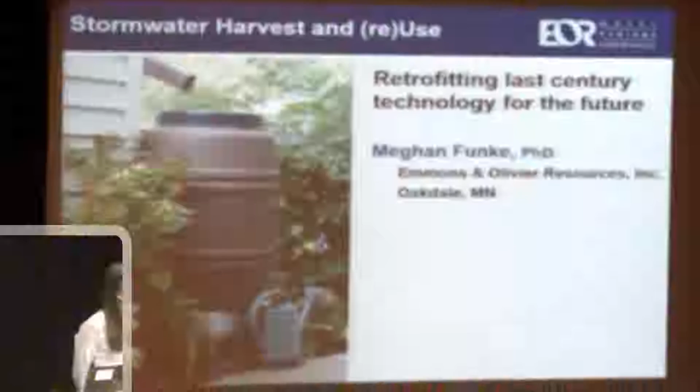So this is going to be a talk kind of expanding on Brett Emmons' talk earlier this morning, focusing in on stormwater harvest and use as a low-impact development practice. So we're just going to talk specifically about that. Titled it Retrofitting Last Century Technology for the Future.

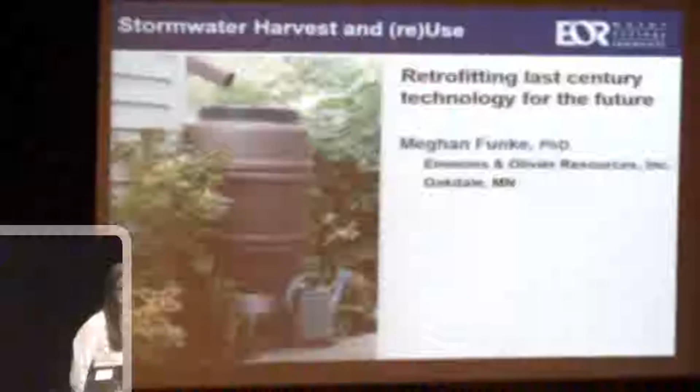The reason we say that is harvesting water and using it is a common practice globally. We've forgotten about it a little in the U.S., where potable water is available everywhere and convenient. We like having very high quality water for all of our needs, even though it's not always necessary.

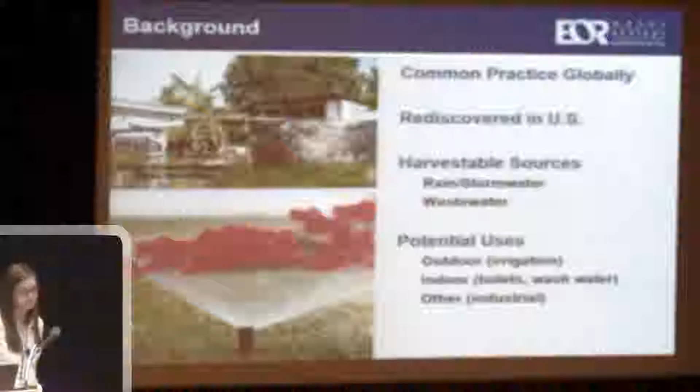But in other parts of the world, especially when there are arid climates or water resources are limited, or in poor regions of the world where extracting groundwater is too expensive, this is a really common practice. So we're rediscovering it in the U.S., and I just wanted to define what we mean by stormwater harvest and use. So mainly when we talk about harvesting water, it's anything from rainwater, stormwater across the landscape, even wastewater.

We started a little early, so I apologize for just coming in.

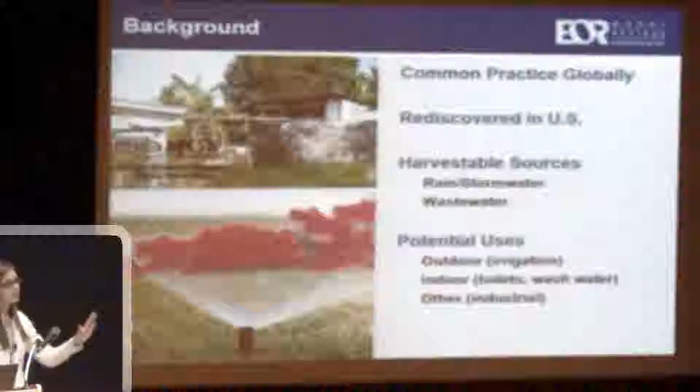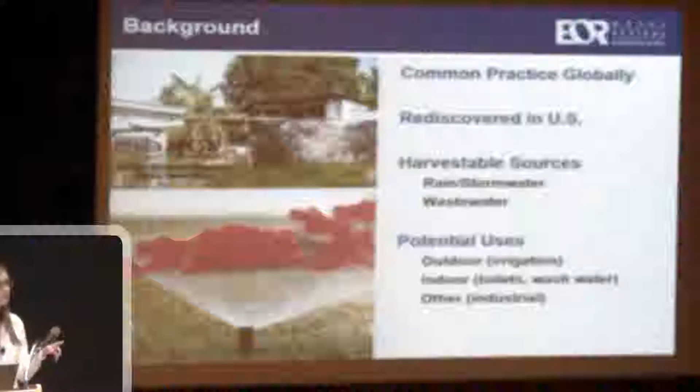So definition of harvest and use, right? So we're harvesting rainwater and stormwater, and then we're using it for all of our needs. So irrigation, toilet flushing, wash water, industrial water. So it's kind of the big universe that we're talking about. But specifically in this talk, it's mainly focused on stormwater harvesting and then using for irrigation.

So this practice is becoming more prevalent primarily due to three driving factors. One, there are new stormwater rules. This is similar to what Brett was talking about in terms of achieving a zero discharge community. So there's a need, instead of just having rate control, to actually reduce runoff volume. So infiltration doesn't always get you there, so you need an alternative practice.

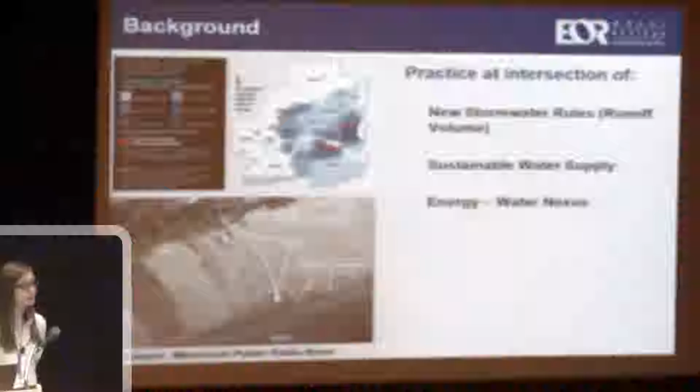And then there's also some growing concerns with having sustainable water supplies. So our increased growth, population growth, and water demands have depleted our aquifers. This isn't really obvious. It's a hidden issue because we don't see our aquifers, but at least in the Southwest, the reservoir levels are at record lows.

And even in Minnesota, in the Minneapolis-St. Paul region, the suburban cities primarily draw their potable water from the Prairie du Chien aquifer. And it's been in the news a lot lately. We're seeing some low levels in that aquifer that's connected to some larger deep lakes that have shown at the surface what these losses are. The bottom image on the left is just showing large lake level declines in White Bear Lake.

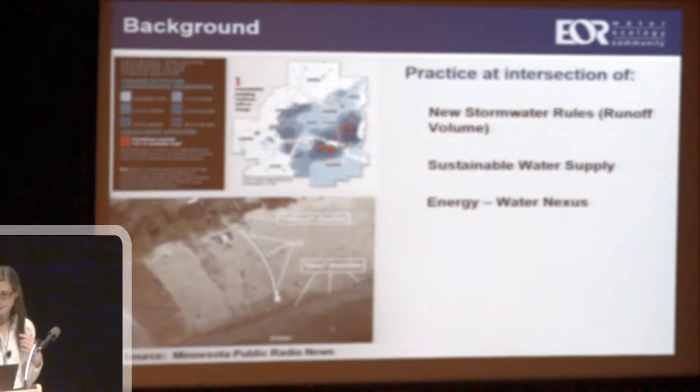And then the third factor is just this, what I would term this energy-water nexus. So what we mean by that is our current system of potable water management, stormwater management, wastewater. It's all very compartmentalized. It's all very linear. So in terms of stormwater management, we have all these costs to handle, collect, treat, and discharge stormwater downstream. So we're trying to get rid of that as quickly as possible.

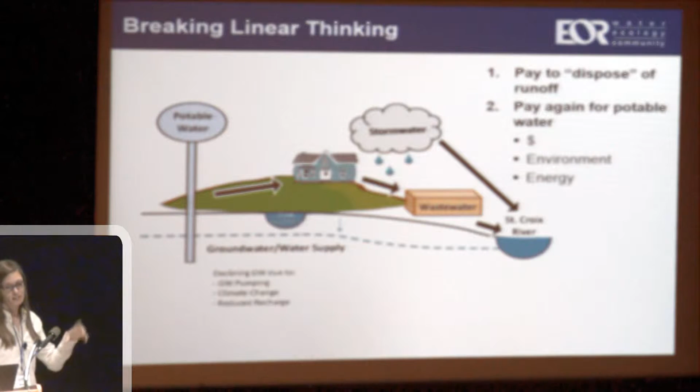But then on the same hand, after paying for all those stormwater management costs, then we go back and we're extracting groundwater, we're pumping it to a centralized location, we're treating it, and then we distribute it to all our homes. So what if we try to break that linear way of thinking and start to close the loop where we utilize some of that wastewater, stormwater for some of our water demands and save a lot of money in terms of cash, but also environmental costs and energy costs.

So as cities and watersheds are trying to meet these new volume control standards, a lot of the cities were coming up with wanting to use stormwater harvest and use for low impact development when they're in these problem sites. So infiltration isn't feasible. They have tight soils, it's close to the groundwater level, there might be some contamination. And so at least we're finding in Minnesota and nationally that this practice is becoming more common.

But as people are trying to use this practice to achieve these volume reduction goals, we had a lot of people coming to us asking, well, how much volume runoff does it remove? How much credit can I get for this practice? So we realized there's a need for a tool to help account for this. It's a much more variable system than some of the other practices.

So we worked with the Minnehaha Creek Watershed District and Mississippi River Watershed Management Organization to develop a calculator tool to help designers model their stormwater harvest and use systems, optimize storage, irrigation potential, and to really get a sense of what is the percent of volume reduction from their site, what's the fraction of pollutants they can reduce. So the goal was to have a relatively simple tool.

There are existing tools out there if you're familiar with some rainwater harvesting calculators, but they were primarily developed for arid regions where the goal is really to conserve water. They want to hoard it to save it for potable water uses. In the Midwest, where water is more plentiful and we have excess stormwater, our goal is really how can we consume as much stormwater as possible. We want to collect as much stormwater and apply it for irrigation or other indoor demands to get rid of that stormwater.

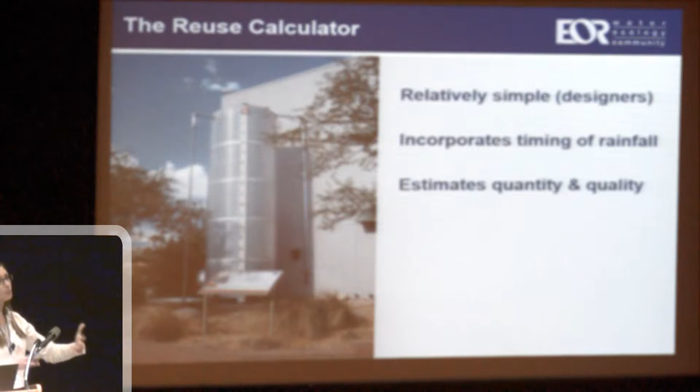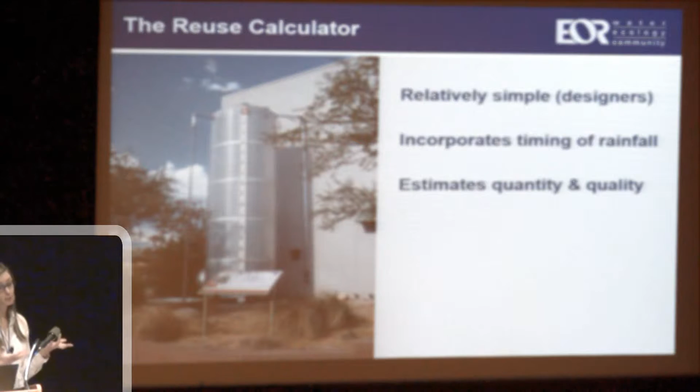So some of the key elements of this tool that we developed is it's on a daily basis, which most of these models are, because timing of rainfall is really important. So if you get a bunch of back-to-back rainfall events and you have a pond or a cistern collecting your stormwater, how often you get a rainfall event is just as important as how big your rainfall events are. And then also we wanted to look at not only volume in that system, but also pollutants. What sort of phosphorus reductions and especially dissolved phosphorus can we remove as part of the system?

So the skeleton and the basis of the model is just a water and a phosphorus mass balance. So there's a watershed runoff generator component, so you wouldn't have to figure out what your watershed volumes and phosphorus flows are. Just use the curve number, percent impervious area to estimate from your site what that watershed runoff volume and load is of phosphorus. And this is particularly related to phosphorus, but in the future could be applied to nitrogen when that's more of a concern.

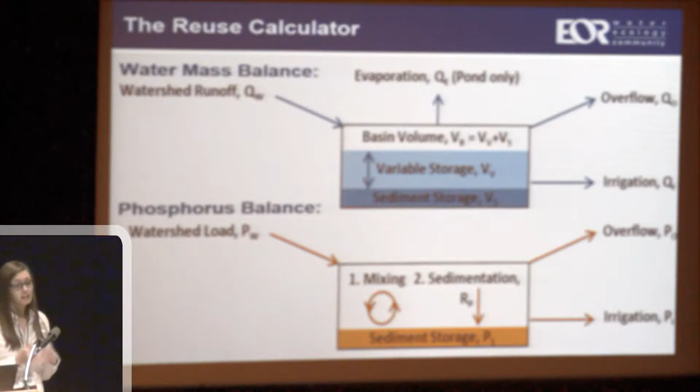And then within the actual storage itself, this is showing an example of, it could be either a stormwater pond or a cistern. Then it looks at your dead pool storage, your variable storage, the total size of the basin, keeps track of all of those components of the flow, in addition to evaporation, maybe from the surface of a stormwater pond, the volume going to irrigation, and to overflow. On the phosphorus side, we wanted to keep track of the mixing and sedimentation processes. Stormwater ponds are built to retain some particulate phosphorus, but then also we really wanted to keep track of that dissolved phosphorus pool as it's going out in overflow and then also to irrigation.

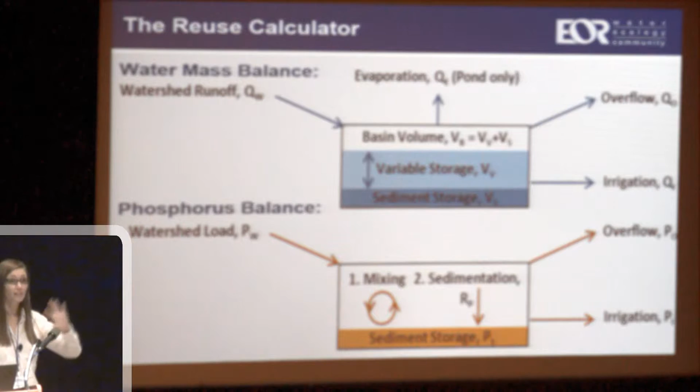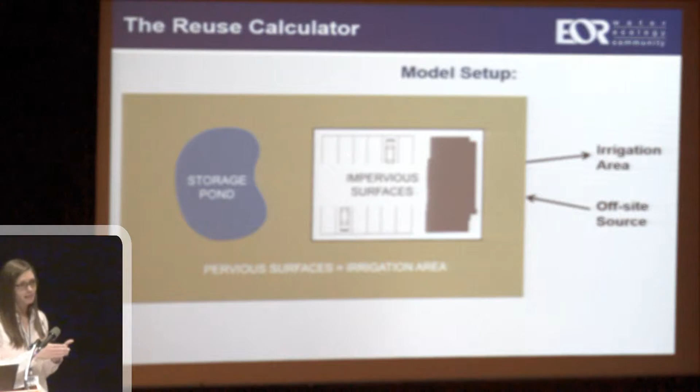So in terms of the model setup, it's simplified. It assumes it's one site. There's one storage area. There's your percent impervious area. You have your pervious area, which is assumed to be what you irrigate. But we've been finding you can use this tool to simulate maybe you're collecting your stormwater from a highly urban site, but you're going to irrigate somewhere else. So you just put all those numbers into the model. So I'm just going to run through an example to show you what the tool looks like and how it can be used to evaluate the benefits of stormwater harvesting use.

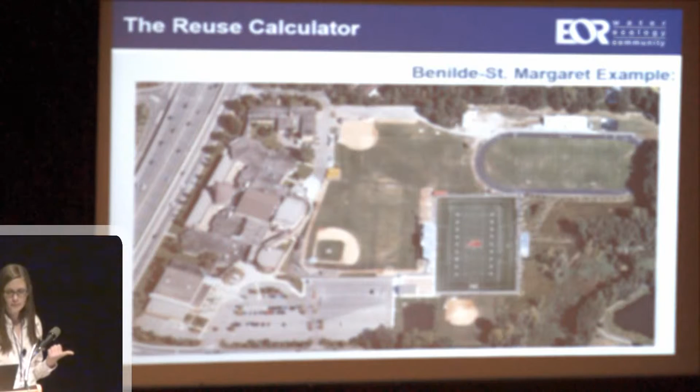So Benilde-St. Margaret's is a private high school in Minnesota. Series of buildings, there's some ball fields, and this comes up better than I thought. So there's black and pink hashing, that's all the impervious area on the site. So the impervious area is 31 acres. And then the ball fields are in the center. There's 2 ball fields and then a track and field. And that's about 8 acres of pervious area that we wanted to irrigate.

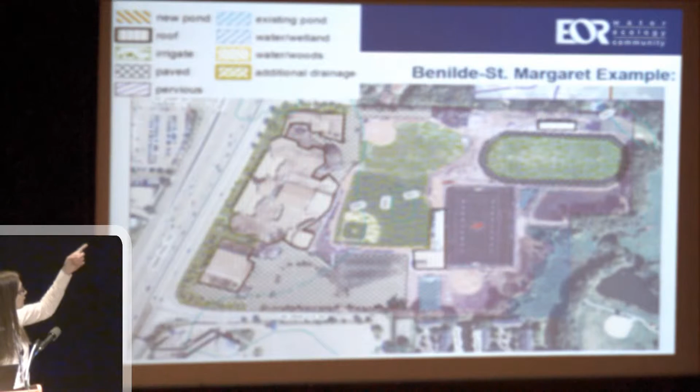So the system is modeling collecting the watershed runoff generated from the 31 acres. There's 2 ponds, one below the track and field in blue hatching and one below kind of a darker field near the bottom. Those are our storage ponds, and it's used to apply irrigation water on those 3 fields. I think it's 30% or 38% impervious area.

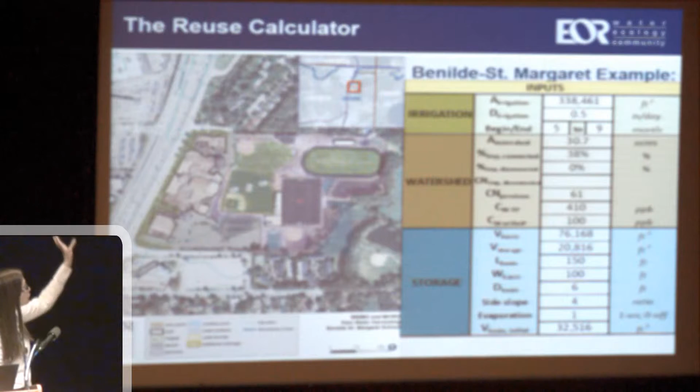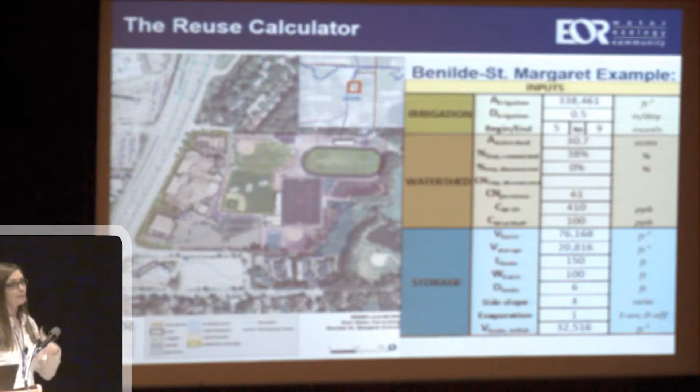So the tool is trying to be graphical and as simple as we could in terms of input so that water resource managers can use it, but it can still be used for designing these systems. So it just goes through, you have your irrigation, you can set how much you want to irrigate, especially in harvest and use when the goal is to consume as much water as possible. You might want to increase that irrigation amount as much as possible. How much can the grass and soil really take up? We're not trying to irrigate as little as possible to keep our grass growing. It's kind of the opposite of our typical lawn management: let's dump as much as we can on to reduce our water.

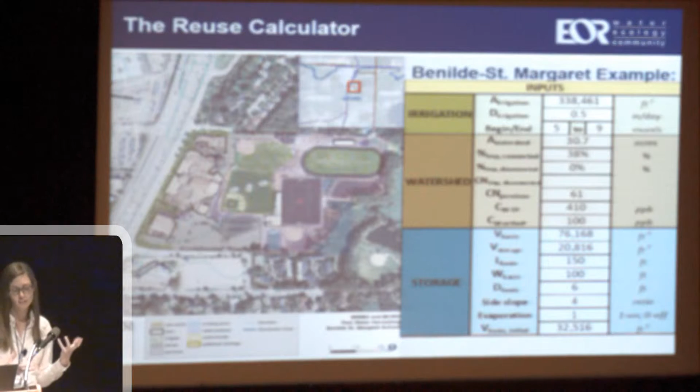In terms of the watershed, that's where you put in your total watershed area, the percent impervious, some curve number estimates to get your watershed runoff volumes and loads. And then there's all the storage components of your pond or your cistern. What's the volume? What's your dead storage? It gets that evaporation from the pond, which will be variable with depth, since that lower volume is a much smaller surface area. So it accounts for all of those variable factors to really help calculate where that volume is going and what benefit is from that irrigation component.

So then kind of the guts of the calculator is there's a graphical output of the results. What I just want to show you, this is 1 year. On the x-axis is just January to December. On the left axis is just the volume in your basin. And so you can see there's a dashed line, gray dashed line on the bottom. That's essentially your dead storage. So we won't ever draw our basin below that amount.

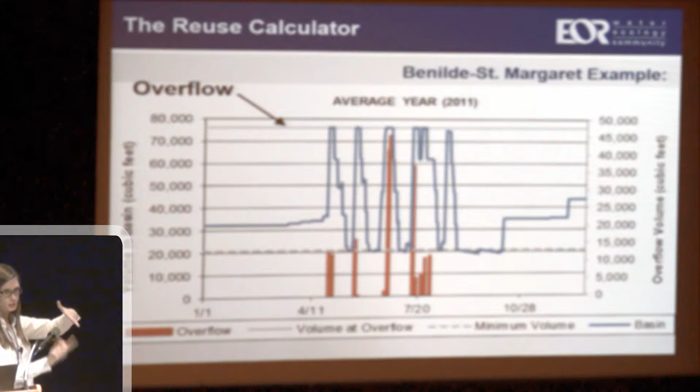We need some volume in the pond or the cistern to allow for phosphorus sedimentation. We don't want to disrupt all the particles as we're pumping out for irrigation. The top line is then our overflow volume, so it would never exceed that amount in volume. And then the blue line is just showing, based on a simulated year with actual rainfall events, what the volume in that basin is. So you can see it starts out about half full, it fills up with a rainfall event, there's some irrigation demand, you see the volume drops, and continues on.

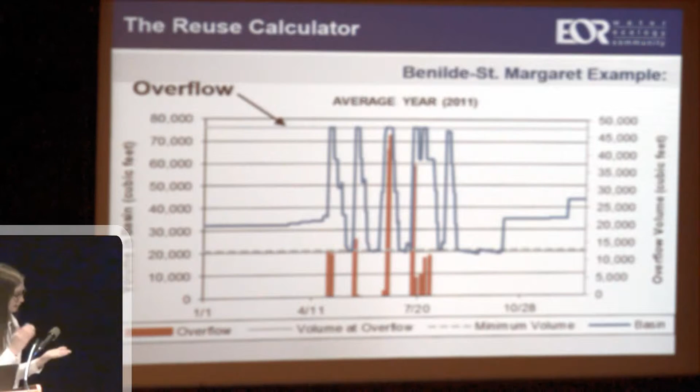So this is useful for designers when you might have existing stormwater ponds, or it might be in a residential area, and it's an aesthetic feature. So there's other things to consider. Maybe you don't want your pond empty all the time because people want to see it as a pond. So you can make sure that it's not always at the dead pool level.

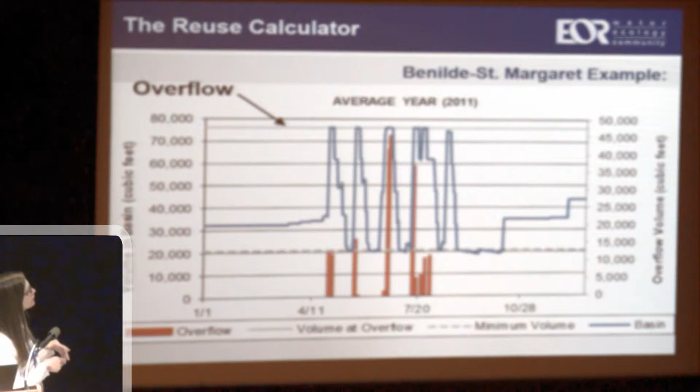And then another thing in terms of sizing is you want to make sure you're kind of optimizing how much overflow you have. So the red bars on the bottom are showing when we have overflow. So we've got a rain event that collected more water than our basin can handle. And you can see how often that happens and how much. So if you want to try to minimize the amount of overflow, maybe you make your storage size larger.

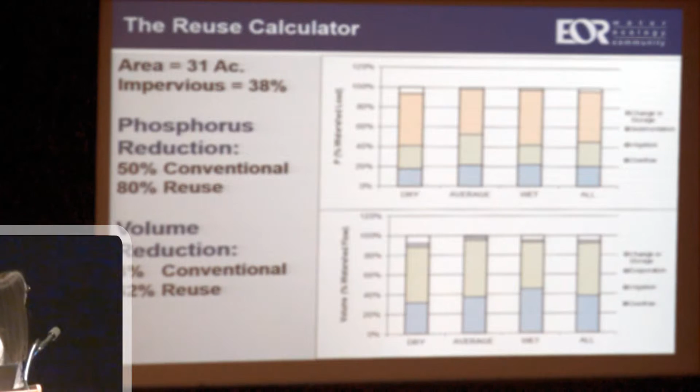And then just overall, calculate on an annual basis. So from this example site, 31 acres, 38% impervious, it also partitions where that phosphorus and the volume is going. So the phosphorus is in the top bar graph, the volume is in the bottom bar graph. And blue is overflow, green is irrigation, and then the orange, especially for phosphorus only, is that sedimentation within essentially your stormwater pond. So it kind of gets at the compartmentalizing. The tool goes through a dry, average, wet year, and then just looks at all 3 years together.

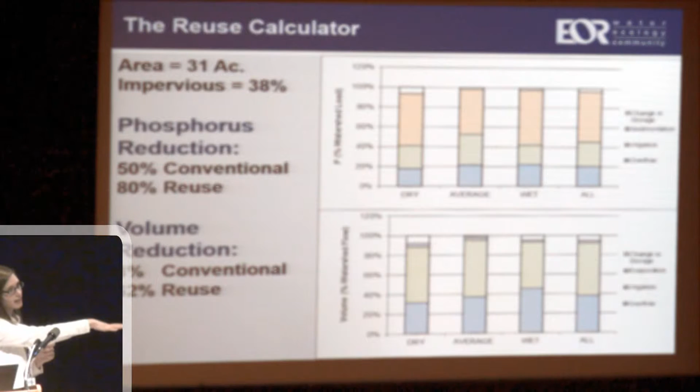But overall, for this site, you can see that if it was just a conventional stormwater pond, we get 50% reduction of phosphorus, mainly just the sedimentation of that particulate fraction. With reuse, we can increase that to 80% because we're getting at that dissolved phosphorus fraction that's going through irrigation and being applied on that lawn instead of being discharged downstream.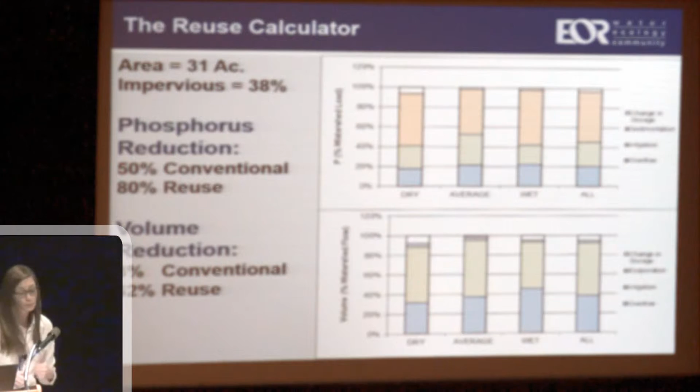In terms of volume reduction, maybe 3% with a conventional system where it's just focusing on rate control. We get up to 62% with a stormwater harvest and reuse system from the evapotranspiration from the irrigation. So we really can increase the amount of volume we reduce and also the nutrients, especially the dissolved pool.

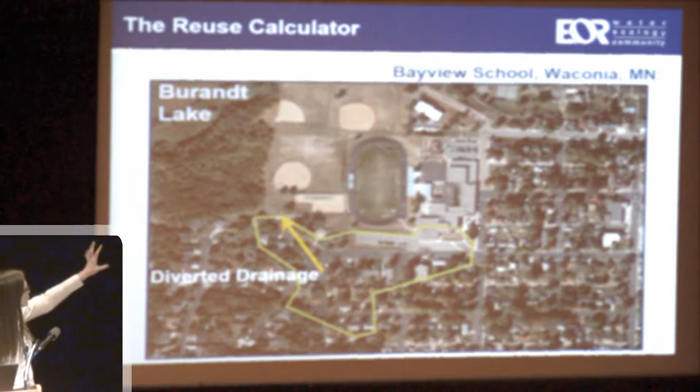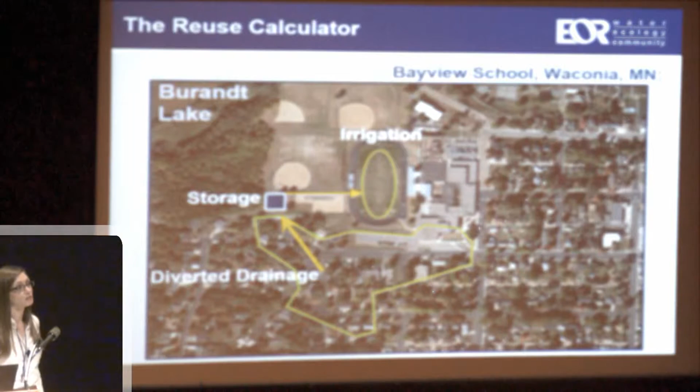So just another example how this can be utilized, and this is actually a system that we're designing, and it's in construction right now, is an example of how you can also use this to divert drainage that's going to a downstream impaired water body. So Burandt Lake is impaired, it's in the top left corner, so we're taking a portion of the neighborhood, diverting drainage to a storage pond and using it for irrigation of a ball field to help achieve those phosphorus load reductions to improve the water quality of that lake.

So overall, just things to think about with stormwater harvest and use as a particular low-impact development tool. One of the great things about it is it's an opportunity to repurpose wet ponds to really maximize the volume and nutrient reduction benefits of existing stormwater detention ponds. I think that was a question that came up in Brett's talk earlier: that seems great, this was a site that was being developed, but what about already fully developed sites that have this infrastructure? Well, here's a case you can go back to these sites, look at the existing ponds, and use that water for irrigation to really maximize your stormwater management.

Again, it's another tool for achieving those stormwater volume control standards, especially in those problem sites. So when there's contamination or really tight soils and infiltration just really isn't feasible, because we're really focusing on that evapotranspiration, that soil absorption through that irrigation component. It removes dissolved nutrients, not many practices do, so that's another focus. And again, it just gets at addressing this overuse of potable water supply. So instead of discharging our stormwater downstream and then using potable water for irrigation, can we somehow have that be a circular system?

So since I have time, one of the things I wanted to walk through is how we use this calculator tool to go through a lot of scenarios to figure out how to optimize your storage in terms of how big you want to make your pond or your cistern, which is what costs a lot of money, and you might have limited area, with the need to achieve these aggressive stormwater reduction goals. So where is that balance between the cost benefit versus the volume reduction?

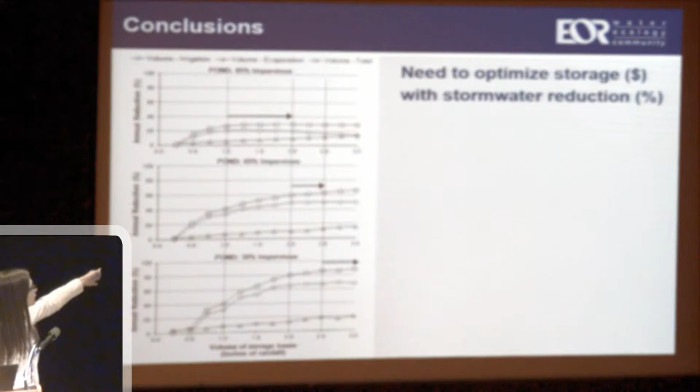On the left, on the y-axis, we're showing the annual total reduction. In this case, this is all volume reduction of the system. So for these 3 test sites, we could change the storage size. On the x-axis, we're showing how our storage unit is sized compared to the depth of rainfall on the site. The dashed lines show a storage unit that holds 1 inch of volume of runoff from the site, 2 inches and 2.5 inches, just to get perspective on how big that storage unit is.

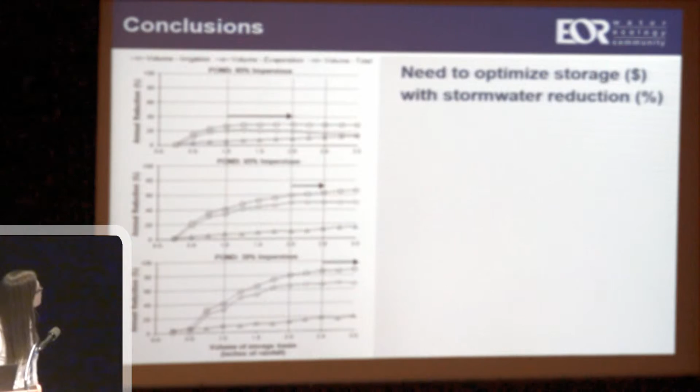And then all the different lines and symbols: there's 3 lines showing volume reduction due to irrigation versus evaporation and then total. So you can just look at the top line, which is the total volume reduction. So if we look at these 3 sites, what you can see is in the ultra-urban setting, the volume reduction line levels off at 1 inch for your storage basin size. As you increase your storage, you're not seeing any additional benefit in volume reduction.

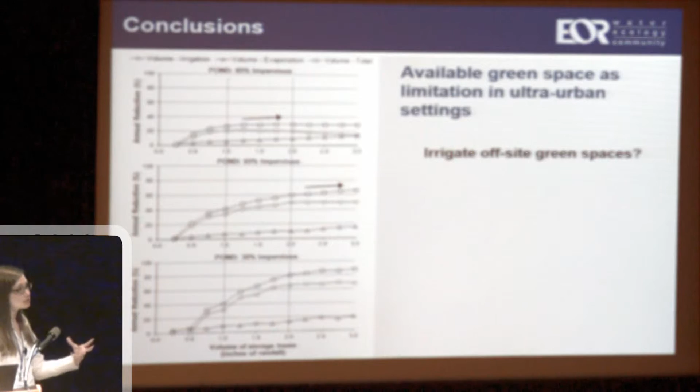And that's essentially because you only have 15% of pervious area, so you're really limited by your irrigation area. It's kind of a, well, of course that would happen, but it helps in terms of planning. When you're in an ultra-urban setting, there should be this understanding that harvest and use is really great, but you're going to have a lot more stormwater runoff that you're collecting. You might need to partner with a nearby catchment, think more regional stormwater management to irrigate maybe an off-site green space, and think of it in more of a community stormwater management focus instead of individual sites.

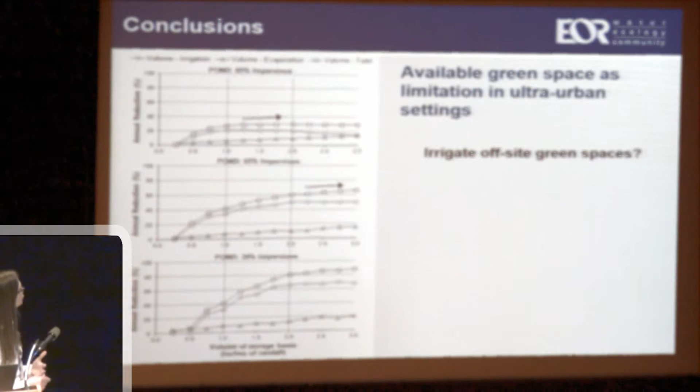When you move to the 65% impervious site, now we're seeing our volume reduction benefits level off once we get to capturing that 2-inch rainfall event. We're able to have a larger storage basin size, collect more stormwater runoff, and we have more irrigation area in that same site to utilize. Once we get up to the very natural site, you can see we can achieve a lot of volume reduction, even getting close to that 3-inch rainfall event. Here, you just have tons of area to irrigate with. So again, combining an ultra-urban site with a nearby natural setting can really maximize that volume reduction.

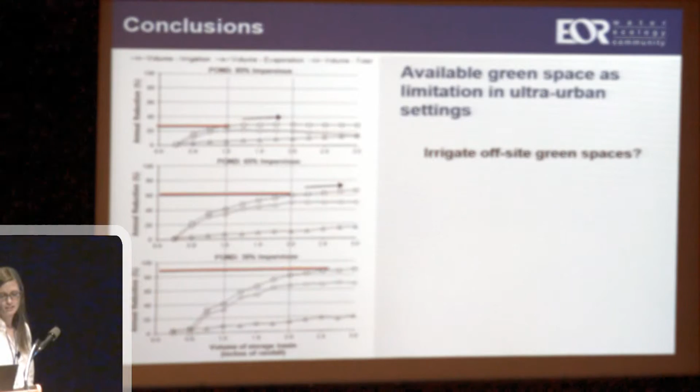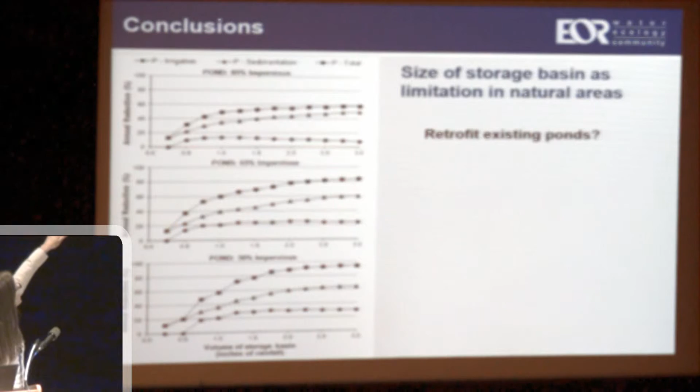A little animation to help you see that. This figure then shows those same scenarios, but instead focusing on the phosphorus reduction. Again, the top line is showing the total phosphorus reduction, and the other two are showing the sedimentation, which is the middle line, and the irrigation, which would be primarily that dissolved fraction.

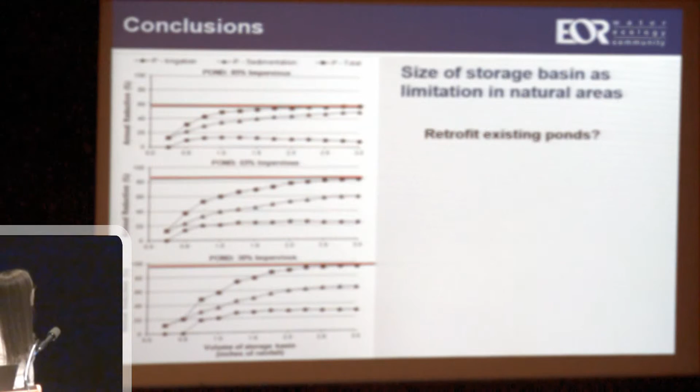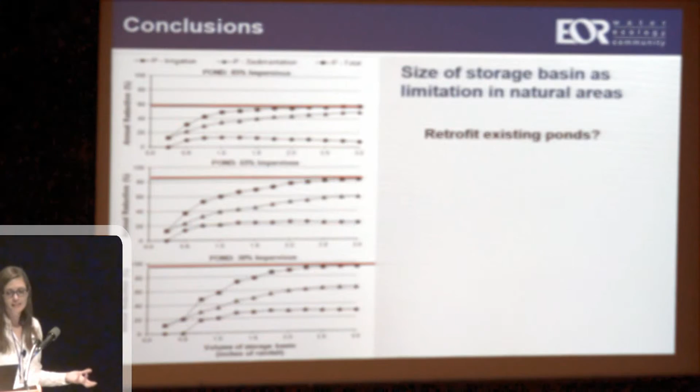So again, in that ultra-urban site, we get maybe up to 60% reduction, just a little bit better than an existing stormwater pond. As we have more area to irrigate, we get up to over 80% reduction in total phosphorus. And in the really natural site, you can almost remove all of your phosphorus, both total and dissolved. You have very little overflow downstream. So again, this is where retrofitting existing ponds is a good idea.

As this practice is coming into use more frequently, there are obvious concerns. If we're irrigating these natural areas, what kind of water quality do we have in that stormwater? It's not potable water. Is there anything in it we should be aware of so we don't have any health risks? And we can also bring it inside and use it for indoor uses. So nationally and also in Minnesota, there's a strong focus on better quantifying what those health risks are, having better codes so that when cities and watershed agencies want to use this tool, they know what criteria they need to meet and there are clear steps.

Minnesota right now is updating their stormwater manual to incorporate these new changes, so there's better documentation for how watershed managers and cities go about implementing this tool. Again, I think there needs to be more focus on quantifying those nutrient reduction benefits. We looked at phosphorus, but nitrogen is also a really important nutrient, as is sediment.

And then again, there's just this uncertainty of how much you can irrigate. So really pushing that envelope on waterlogging tolerance of plants and figuring out the most you can put in that soil to maximize that benefit of irrigation use.

So again, this was conducted in partnership with the Minnehaha Creek Watershed District and the Mississippi Watershed Management Organization. The calculator tool is available on the Minnehaha Creek Watershed site. You can also email me for the link if you want to see what it looks like. And that Watershed District has a lot more information about it on that same webpage.